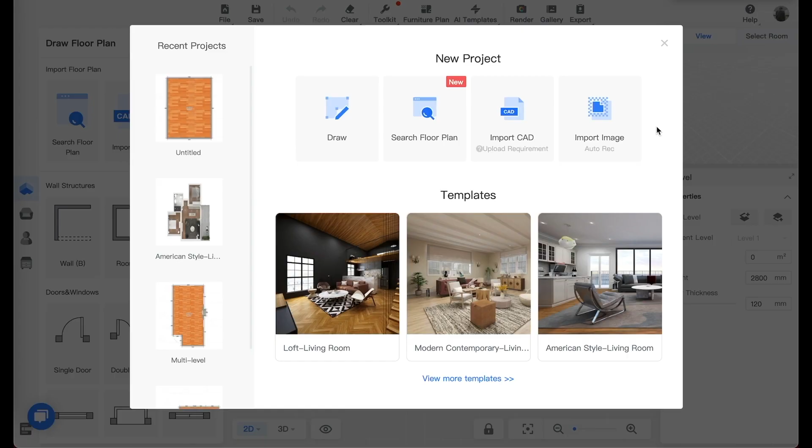First, we need to create a project. Go to new project. I'm going to use one of the bathroom templates, so we don't have to rebuild everything. Let's go here.

Once we're in the view, let's go to 3D view by pressing 3 on the keyboard. Zoom in or use WASD.

Let's delete this mirror, and let's create a mirror here on the wall. Click the wall editor.

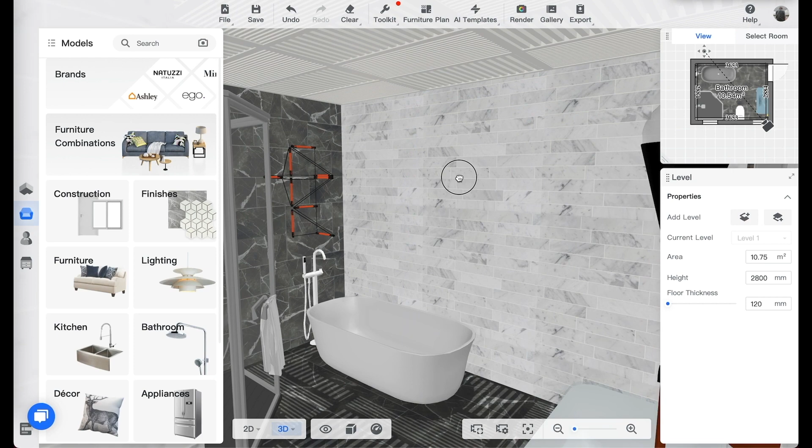This is where you can build any geometry shapes, not just mirrors. First, click on the circle and draw a circle, let's say 600 in radius.

You can see there's an option to choose a light strip or not. You can also select if you want an indented cove lighting or an external expansion cove lighting. The wording might be a little confusing, so here we can also ignore this.

Let's just escape out, click on the surface, and set extrusion. Meanwhile, I'll remind you there's a 3D view window where we can easily check out the views here.

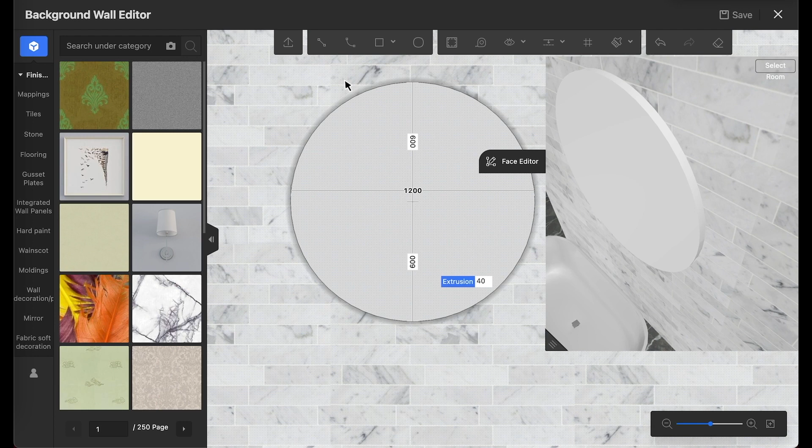Let's set the extrusion rate to about 40, so you see the thickness here. Once I click on the edge, you'll see an option where I can choose the sections.

This is basically showing a section of the indent. If I click on exterior expansion, it's going to actually expand.

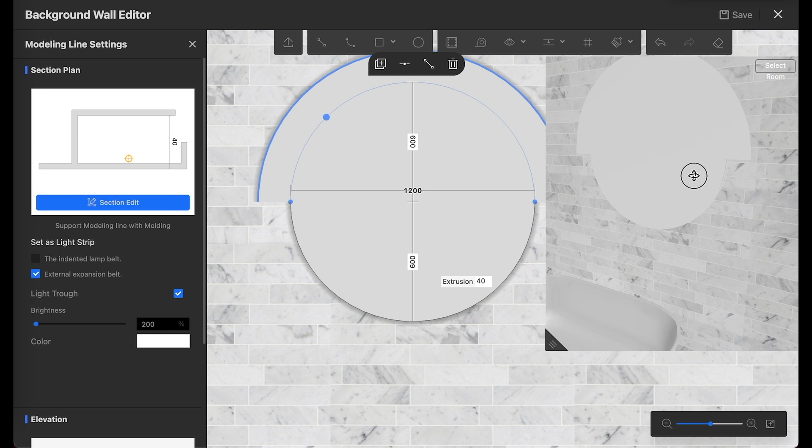Let's go back to the view. For this one we don't need to really add another layer to our mirror, so let's choose the indent option.

Then we can do the same thing for the second half, the bottom half of the mirror. Let's select the indented belt. Once we select this, you can see Coohom already added layers, which you can't really tell here.

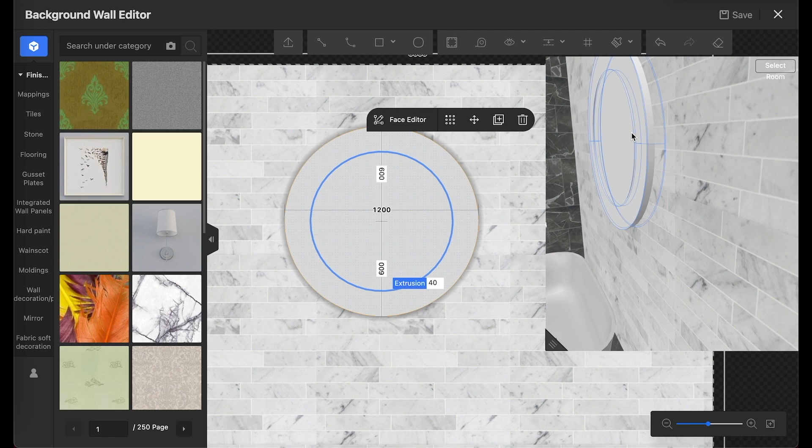Let's click into it and go to section edit. This is where you see the light source, and this is where you can add corner lines with different molding. The key point is you can adjust the thickness.

See, this is the thickness of the geometry. You can definitely expand this to stretch out more, say to 160, and you can see there's more light leaking towards the edge of the mirror.

And then when you hit Done, this is the kind of lighting drop you can see, already updated. Same thing for editing this one, 160.

So essentially this is the surface of the mirror, and the cove lighting is the light source behind the mirror. This is the kind of opening you're creating for the lights.

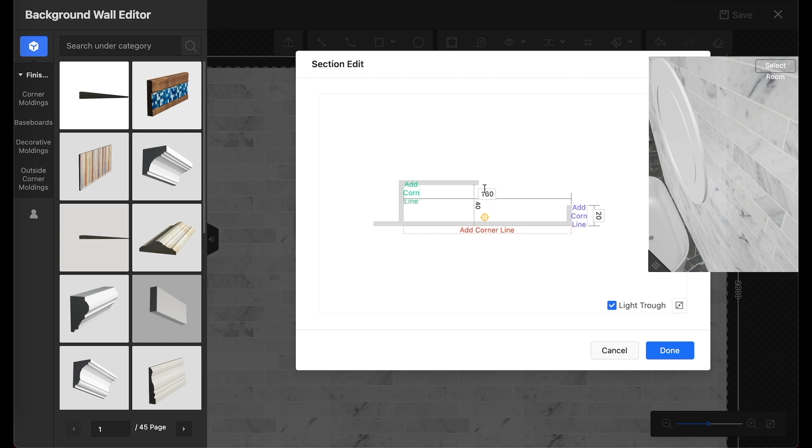Select OK. One thing I do want to note is once you click on the edge, you'll also be able to adjust the brightness level.

Let's change it up a little bit so it's more obvious in our render. Let's change it to 500. You can also change the lighting color to yellow.

This is all we need to create this model. Hit save, and let's exit.

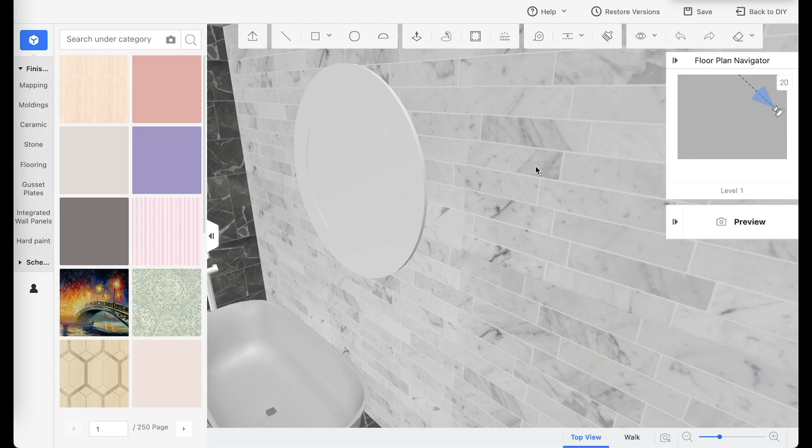Let's go to render view and see what this looks like. Let's do HD render, and set the ambient lighting setting to indoor. Hit OK.

Alright, let's take a look at that. So you can already see the cove lighting detail from behind. Let's go to the next step.

How do we change the finish to a mirror, which is super simple.

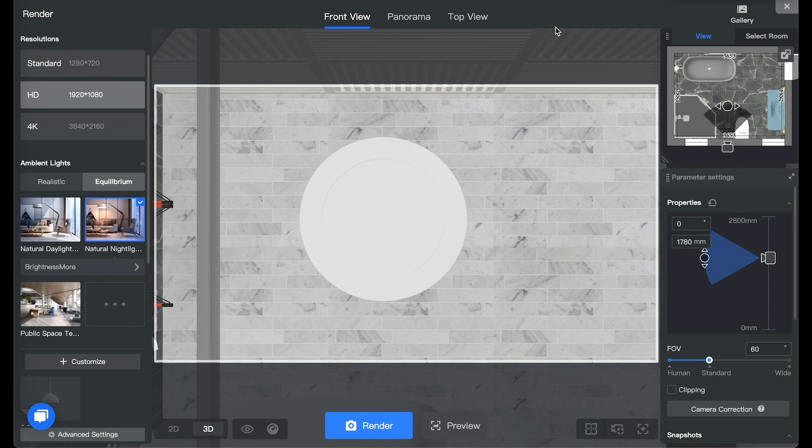Change the material to a real mirror. Alright, here you go. So the trick here is there's one material you can just simply search for, mirror, making sure you're favoriting this material.

It's called silver mirror PWMB0021. Drag it on top of the finish. This texture tells you that you got it right - this is the perfect reflection mirror material that you're looking for.

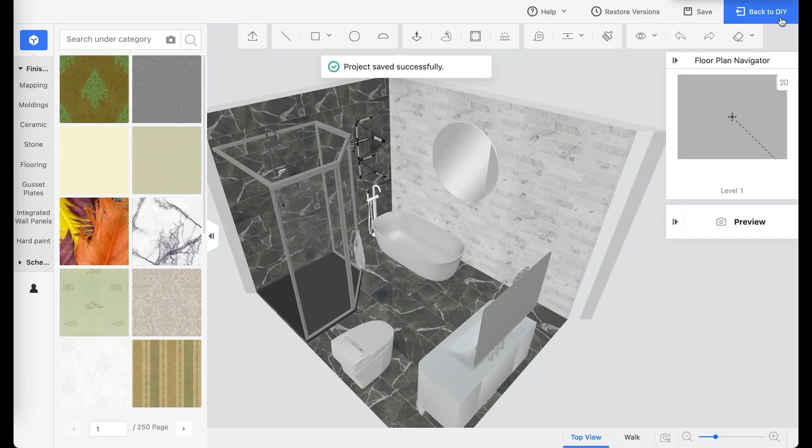Let's finish the change and hit save. Let's go back to our view, and let's go to render again.

Another thing you want to make sure is you have specular reflection turned on. What it does is give you the true mirror reflection that you needed.

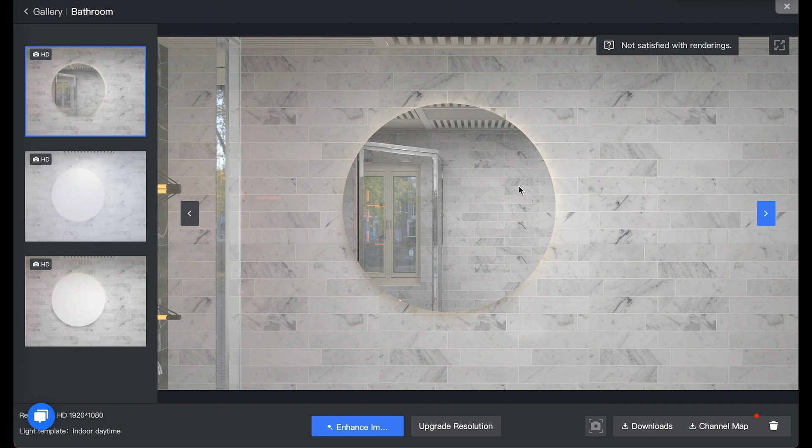And then let's hit render. Let's see - there you go. You got a perfect mirror looking backwards with all the reflection details in here, and then you have the cove lighting behind it.